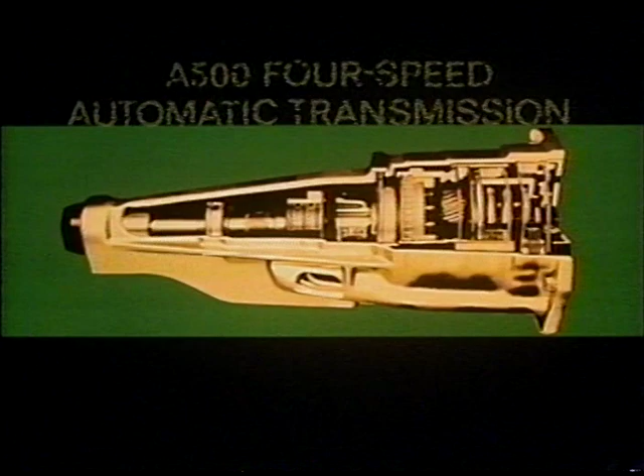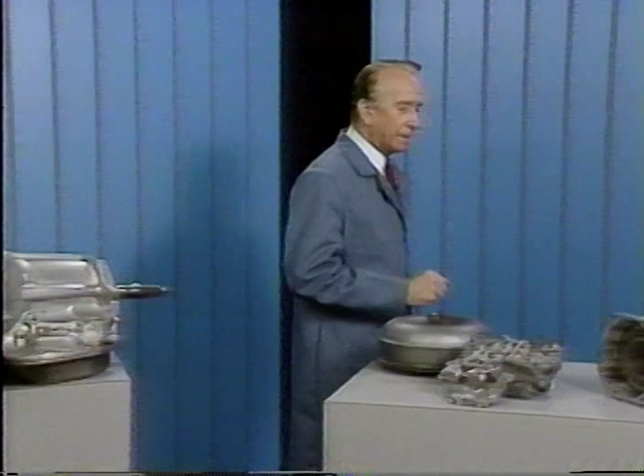Today, we're going to cover the design, operation, and service procedures for the all-new A500 transmission. The A500 was designed to fill a need for buyers interested in increased fuel economy. The A500 begins as a modified A999 three-speed LoadFlite automatic transmission. Then, an overdrive unit in place of the former extension housing provides fourth gear in an overdrive ratio.

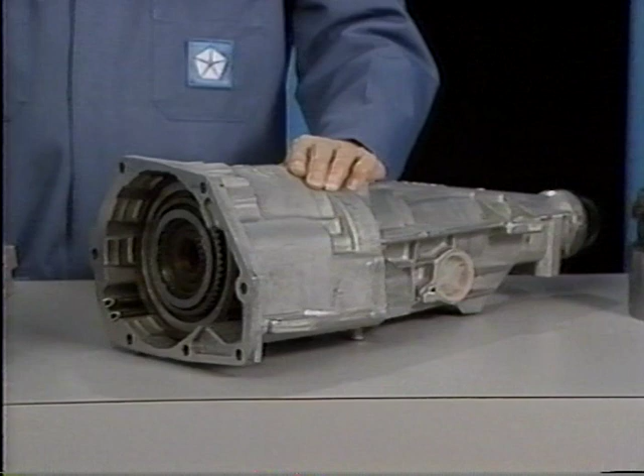This transmission is designed for use with the 3.9-liter V6 in 2- and 4-wheel drive N trucks, namely the Dakota, and B-Ram vans and wagons and D-Ram pickups with the 3.9-liter V6 or 5.2-liter V8. This overdrive unit is designed for truck use and is capable of handling up to 400 foot-pounds of torque. The A500 is 6.5 inches longer than the A999, and it's about 50 pounds heavier.

The other major feature of the A500 is this lock-up torque converter. The lock-up torque converter is electronically controlled and hydraulically activated. Lock-up will occur only in fourth gear overdrive and under conditions determined by the single module engine controller.

A switch on the instrument panel will prevent fourth gear and torque converter lockup operation. This is desirable when towing or when climbing steep grades. This switch will automatically turn off whenever the ignition is turned off. If lockout is desired, push the switch after every startup.

Other modifications of the A500 include the output shaft of the three-speed portion is now referred to as the intermediate shaft, and the overdrive shaft is now the output shaft. The governor and speedometer drive have been moved to the rear of the unit. The overdrive case now contains two bearings. One is the output shaft front bearing, and the other is the output shaft rear bearing.

There are no rotating seal rings or pressurized oil for the overdrive and direct clutches in the overdrive housing. The governor is the only component receiving pressurized oil through these slip-fit tubes. Governor pressure and overdrive pressure taps are provided in the rear of the main case for in-vehicle testing.

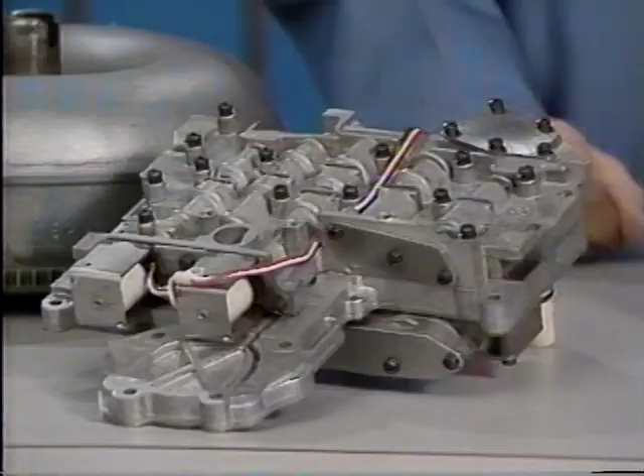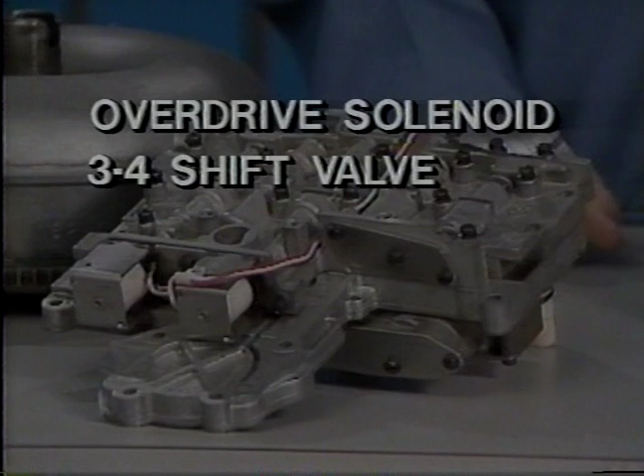The valve body has been modified for use in the A500 by adding several new valves. There's an overdrive solenoid, a 3/4 shift valve, a 3/4 timing valve, a 3/4 accumulator, and a 3/4 shuttle valve. Once in fourth gear, the lock-up solenoid, lock-up valve, and lock-up timing valve accomplish the hydraulics to lock the converter turbine to the torque converter housing.

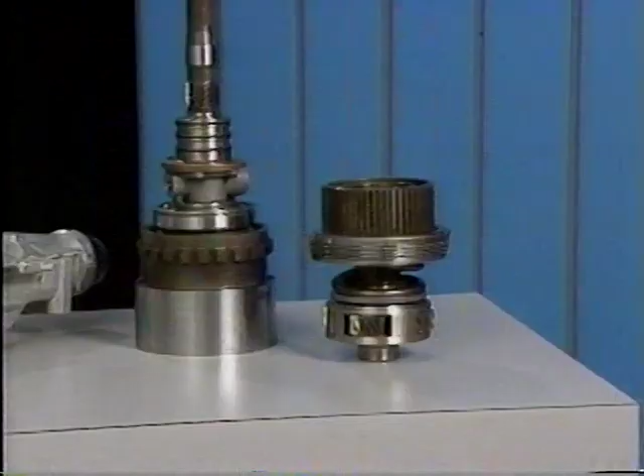The overdrive gear ratio is supplied by a third planetary gear set and its overdrive clutch. In direct drive in third gear, the power flow goes through the direct clutch and the overrunning clutch. This very strong spring, rated at up to 800 pounds, holds the sun gear to the annulus for direct drive. For coasting or reverse gear, power flows only through the direct clutch.

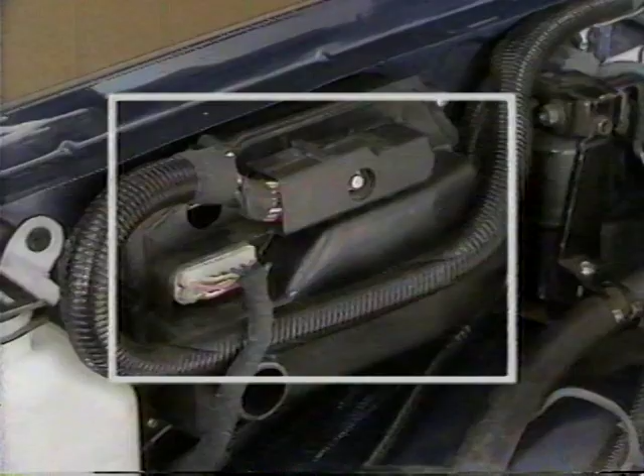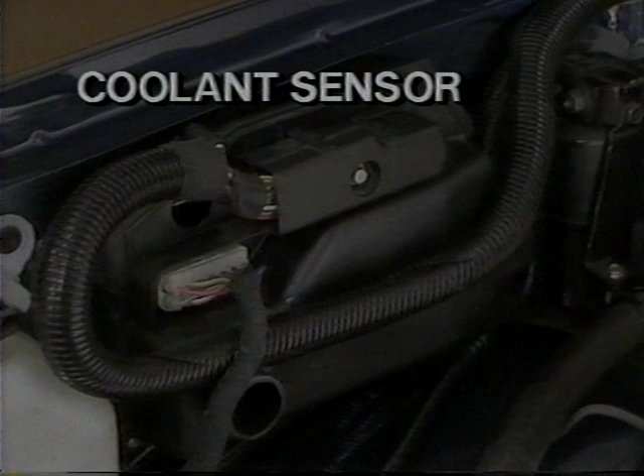The simple shift into overdrive or fourth gear is an adventure in electronics and hydraulics. The shift is determined by the SMEC. When the vehicle is traveling in third gear over 25 miles per hour, the SMEC uses the following information to allow the shift. The SMEC checks the coolant sensor signal, 60 degrees Fahrenheit minimum. It also checks the engine speed sensor, the vehicle speed sensor, the throttle position sensor, and the MAP sensor.

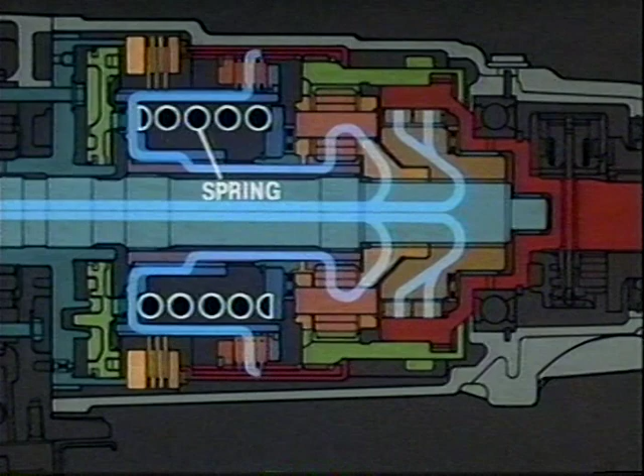In third gear, the power flow comes off the intermediate shaft simultaneously into the planet carrier and the overrunning clutch. The direct clutch holds the sun gear to the annulus under spring pressure for a 1-to-1 ratio. The overrunning clutch carries the power flow during the shift into fourth gear.

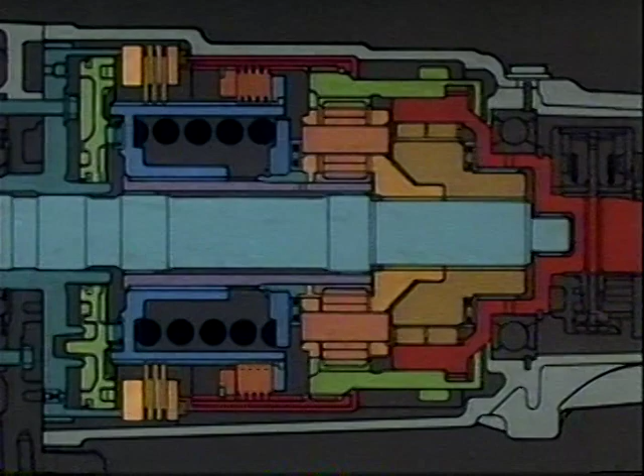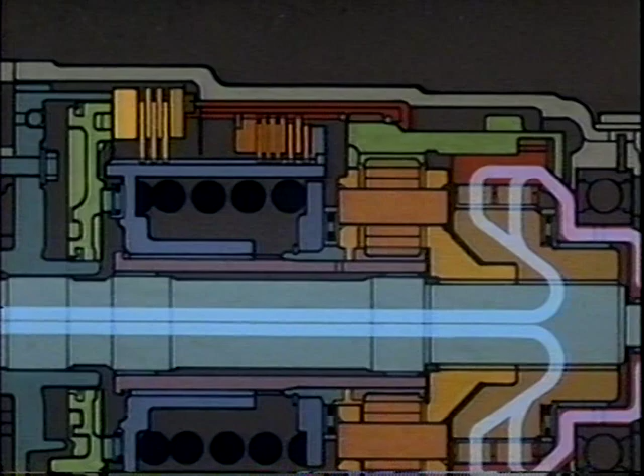When the SMEC energizes the overdrive solenoid, the third gear line pressure starts to move the overdrive piston rearward. The piston pushes the sliding hub and begins to compress the direct clutch spring. Now, with spring pressure relieved, the direct clutch is disengaged. Power flows only through the overrunning clutch.

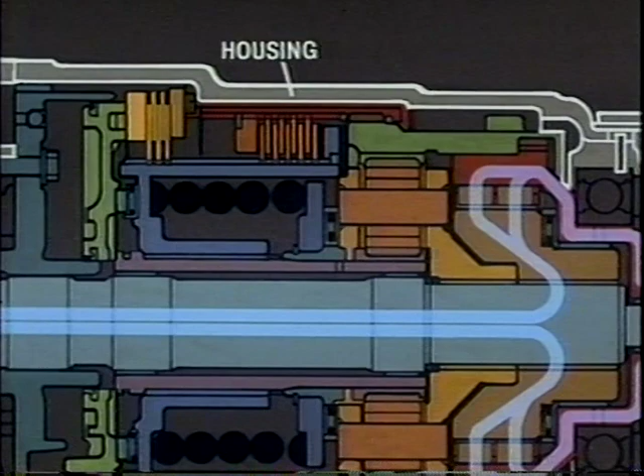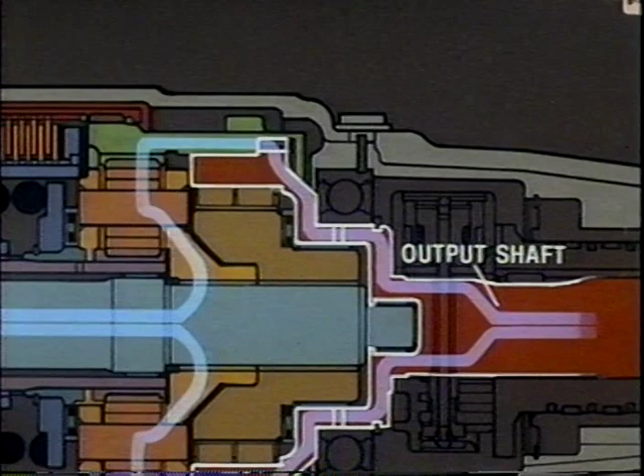As the sliding hub is forced further rearward, the overdrive clutch engages, holding the sun gear to the housing. As power enters the planet carrier, its gears move around the stationary sun gear, so now the engine can turn less for one revolution of the output shaft.

The lock-up torque converter is also controlled by the SMEC. Once in fourth gear, the SMEC signals the lock-up solenoid to close, supplying pressure to the lock-up valve. The lock-up valve directs pressure to the torque converter where the turbine is clamped to the spinning torque converter housing. This eliminates any slipping normally attributed to automatic transmissions. The lock-up valve releases the torque converter to normal operation prior to the 4-3 downshift.

Well, now that we've seen what the A500 overdrive unit is and how it works, let's go through a step-by-step disassembly and assembly procedure for the A500 overdrive unit, since that is the new hardware. Before raising the vehicle, place the gear selector in low gear. This will retract the parking rod for easier disassembly.

If there is major hardware failure within the overdrive unit, or if the fluid is contaminated enough to cause problems with the main portion of the transmission, then remove the entire transmission. If the diagnosis indicates clutch or governor problems only, then remove only the overdrive unit.

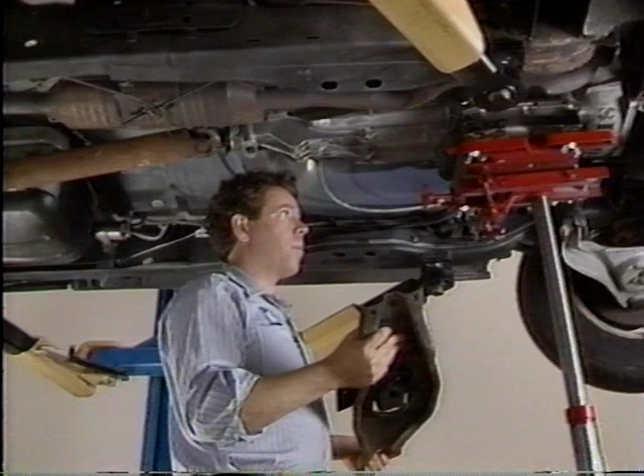To start the overdrive removal, drop the oil pan, drain the oil, and then reassemble the pan. Support the transmission and raise it enough to remove the cross member. Next, remove the speedometer cable.

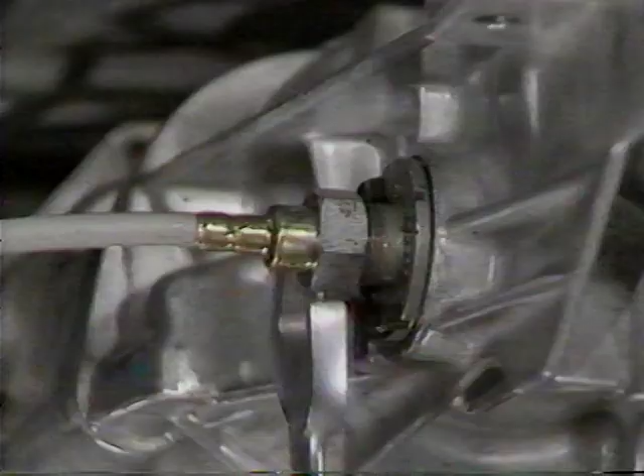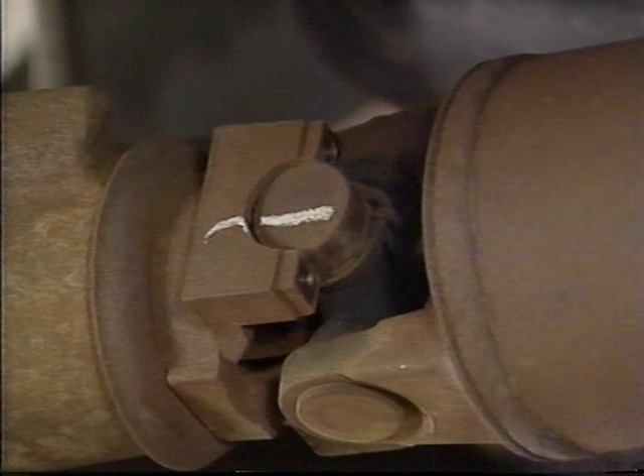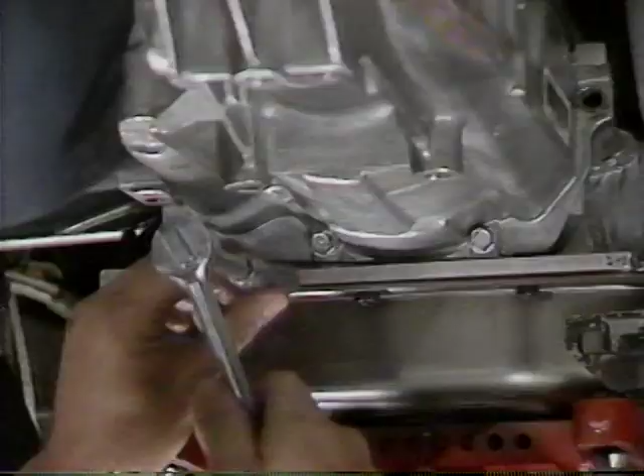Remove the yoke straps, mark the position of the drive shaft, and remove it. There are 7 bolts securing the 2 transmission portions together. Loosen the 2 cases after removing the last bolt. Very carefully pull the unit off of the intermediate shaft.

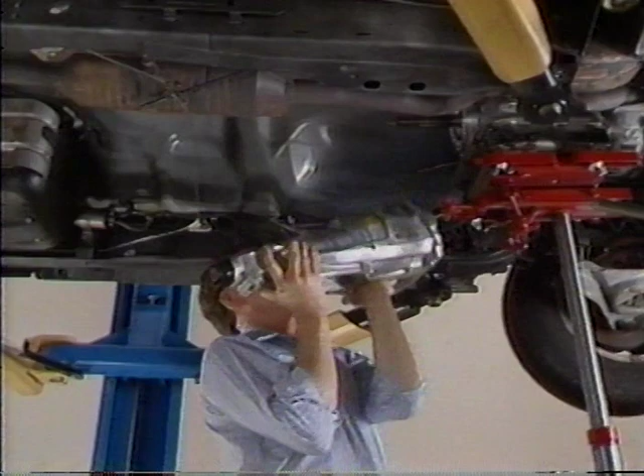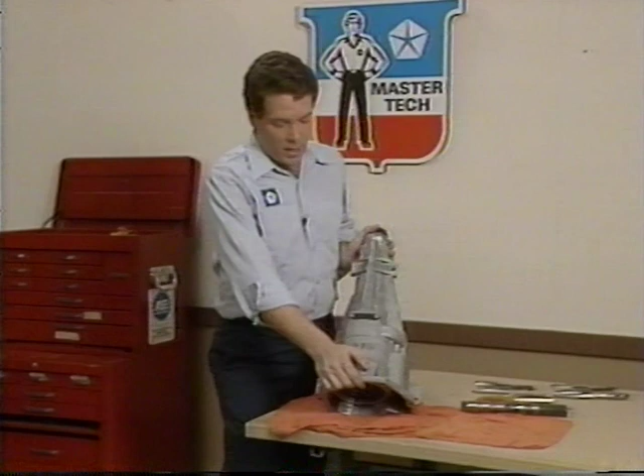A bearing and a select spacer may be either on the piston, the sliding hub, or the intermediate shaft. You'll need these to check clearances after reassembly. Once at the bench, tip the unit so that any excess oil drains into a few shop rags. Watch for any sign of abnormal wear, such as clutch material or metal fragments in the oil.

Now, this is a very sturdy unit, and you should not expect to be totally disassembling every piece. But in the event of a failure within the overdrive unit, you must inspect each part. Remove the overdrive clutch snap ring. Then pull out the alternating metal and friction clutch components. Take a close look at each clutch component for signs of wear.

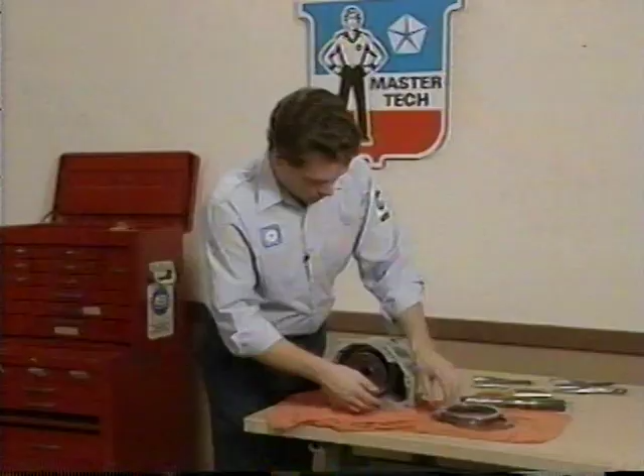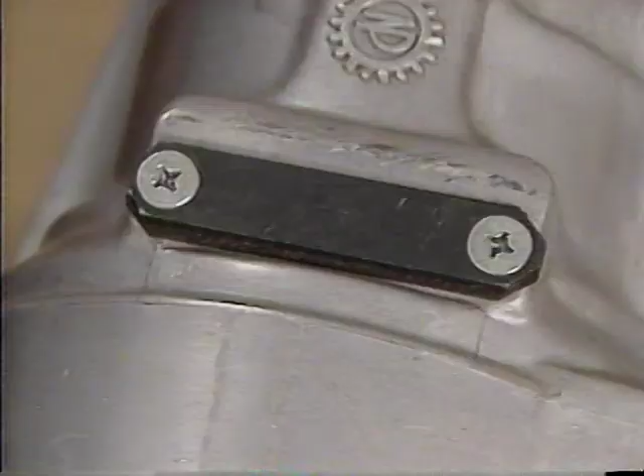Next, take out the wave ring. This special ring acts as a cushion to absorb the shock when the overdrive clutch engages. And then there's another large snap ring to be removed. Unscrew the 2 Phillips screws and remove the access plate. This snap ring holds the output shaft front bearing in place.

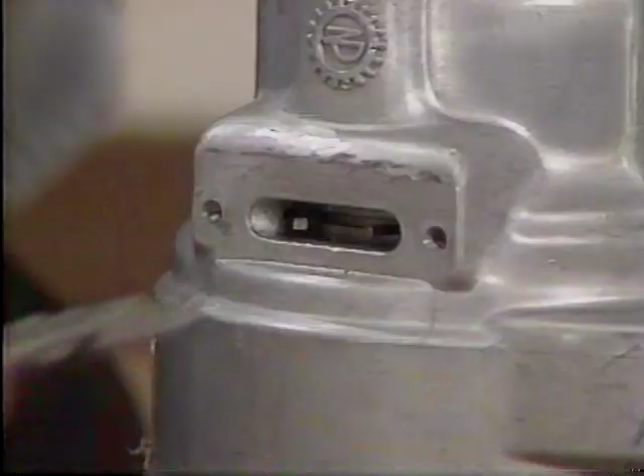Now, since the entire case must be inverted to remove this ring, insert the alignment tool, Miller Special Tool C6227, and invert the case on the shaft. Expand the snap ring and lift the case off the gear train.

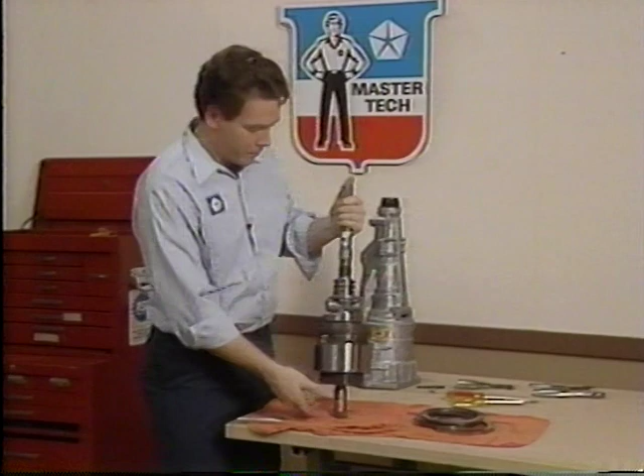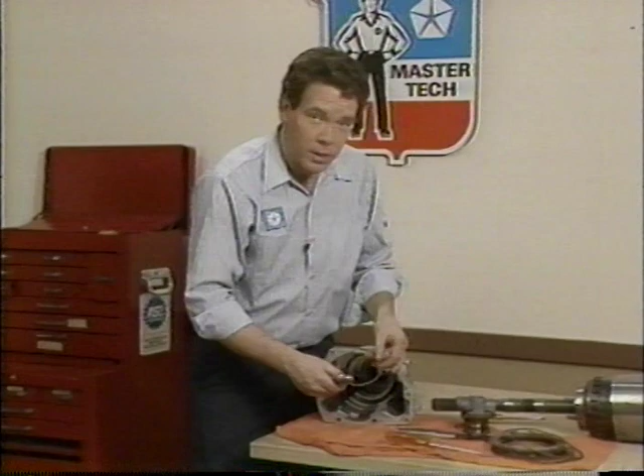Follow service manual procedures and remove the governor and shaft key. Remove the snap ring, then remove the governor housing snap ring. Now you can remove the governor housing with the slip-fit tubes out of the case. Using snap ring pliers, remove the output shaft rear bearing snap ring. Now, by tapping the case on the bench, the bearing should drop out.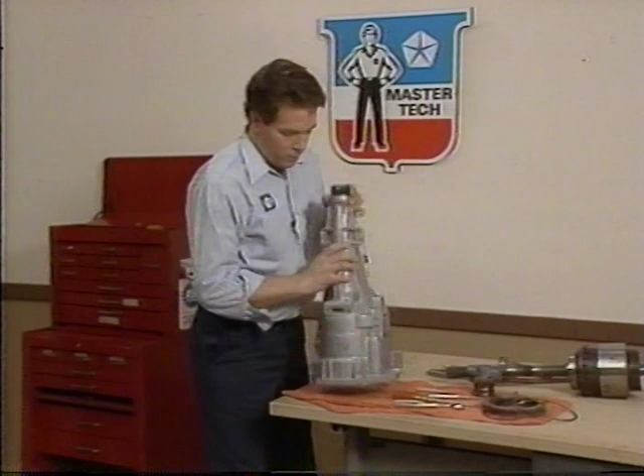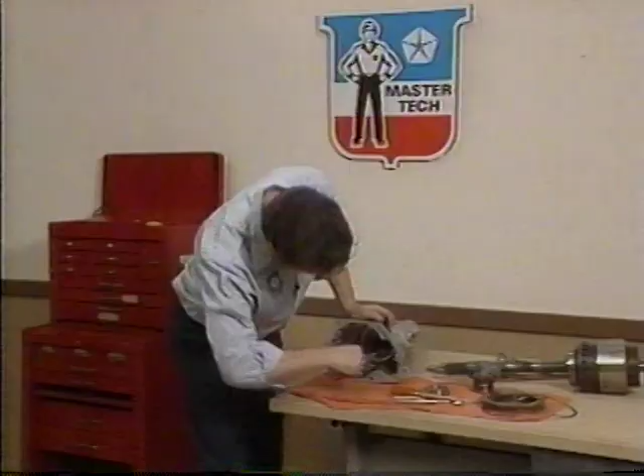All right, next, let's remove the parking mechanism. First, remove the reaction plug snap ring. Next, unscrew the bolt securing the dowel and parking pawl. Now, another tap of the case on the bench will cause the dowel, parking pawl, and reaction plug to drop out.

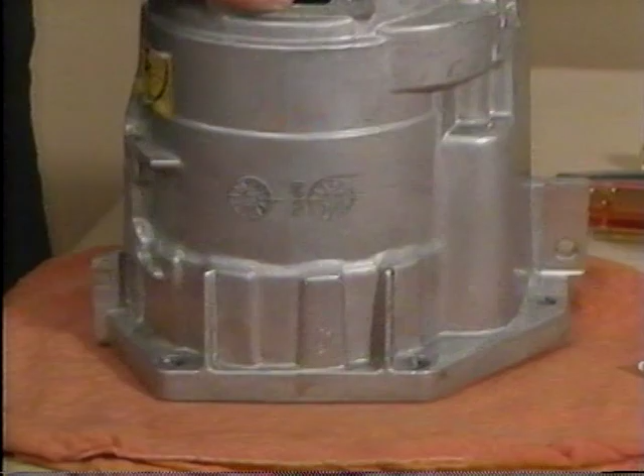At the very rear of the case, a standard A727 rear transmission bushing and seal are used at the output shaft. Now let's take the gear train to the arbor press. It's very important that you use an arbor press, not a hydraulic press, to compress the direct clutch spring. A hydraulic press doesn't have the travel required to perform this critical step safely.

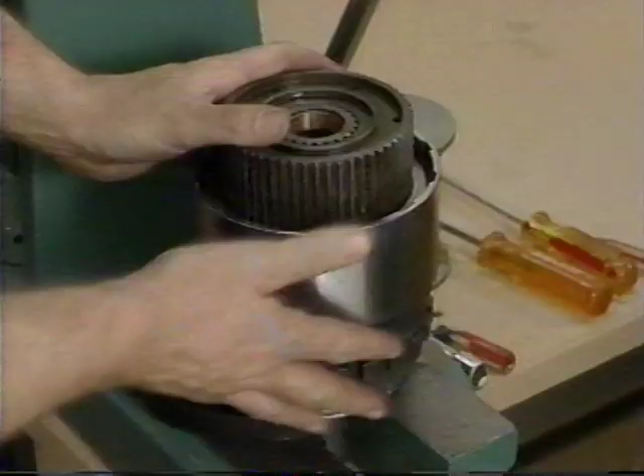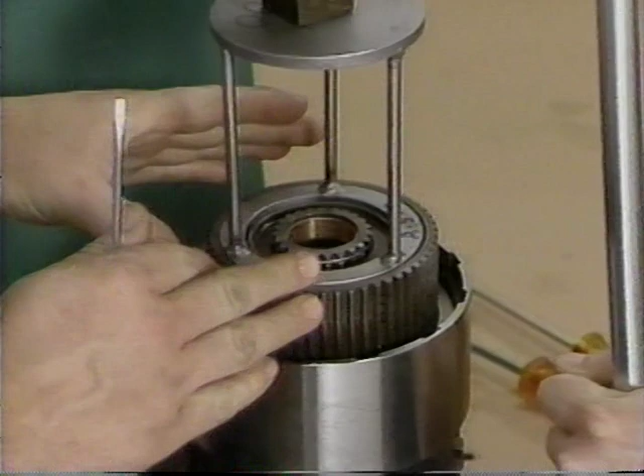Place the output shaft in a fixture which will support the output shaft flange. With the assembly properly supported, place the special tool C6227 in place. Have a helper compress the direct clutch spring. When the hub is compressed, you will now be able to safely remove the larger load retaining ring, and the smaller load retaining safety ring.

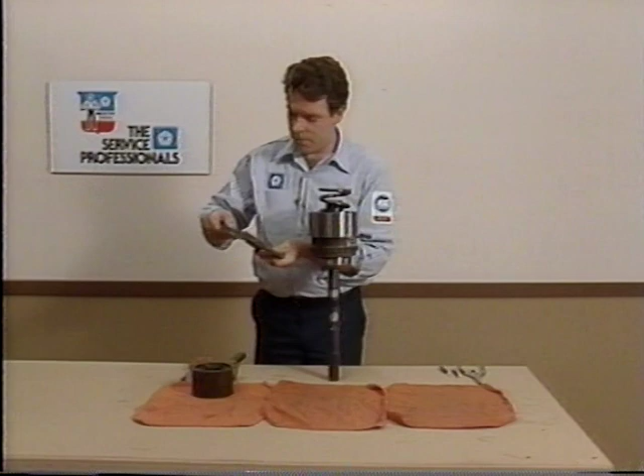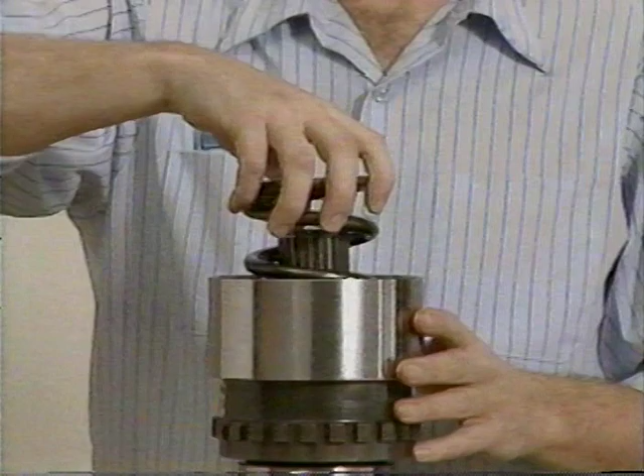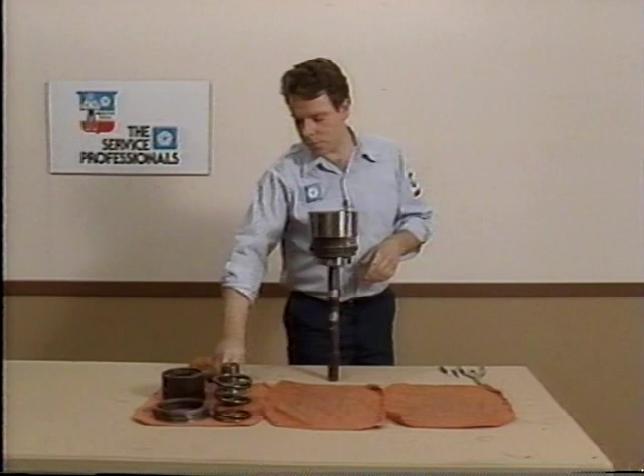Now that the direct clutch spring tension is relieved, the rest of the unit can be disassembled. Now lift off the sliding hub with the direct clutch on it. Remove the components of the clutch and inspect them one at a time. Next, remove the direct clutch spring, the sun gear, a needle bearing pack, and the planet carrier.

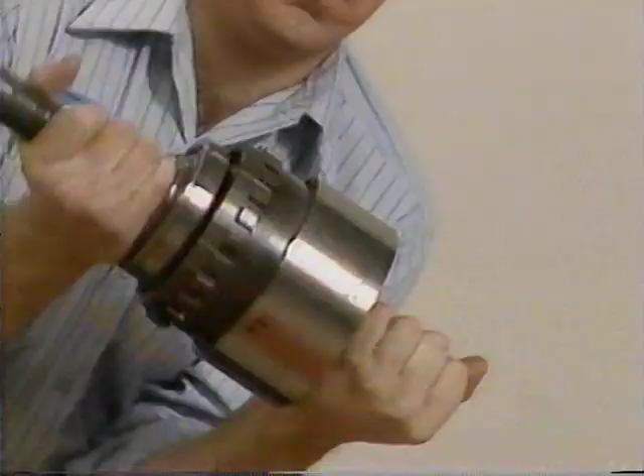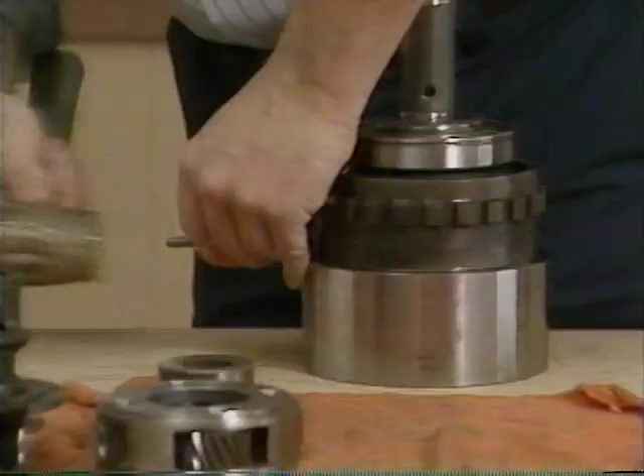Invert the assembly, and using expanding snap ring pliers, you can remove the overrunning clutch intact with a quick counterclockwise twist. Also, remove this needle bearing. Now index the direct clutch drum to the annulus for exact assembly. Two wire retaining rings secure this direct clutch drum to the annulus, a front one and one partly under the rear of it.

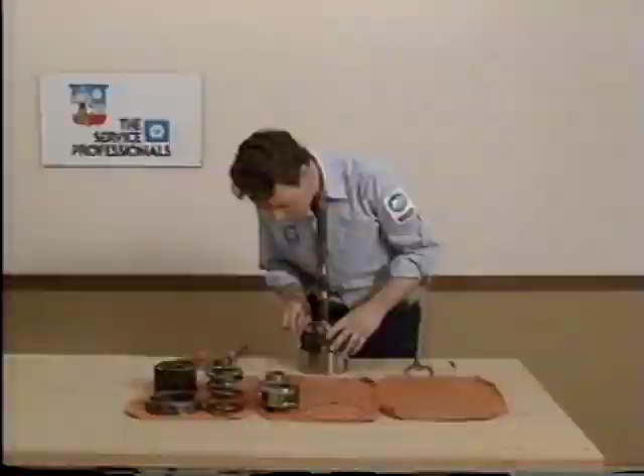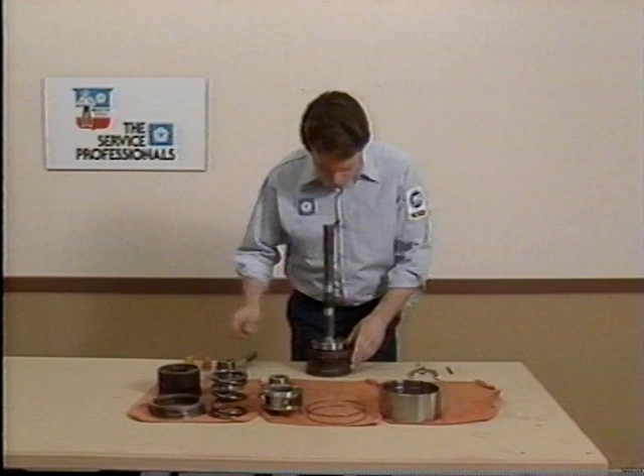Now the drum slides from the annulus. Index the annulus to the output shaft for exact reassembly. To remove the annulus, one snap ring secures it to the output shaft. Now a light tap with a soft mallet pops it off the shaft. Now the only component left is this output shaft front bearing. Removing it, however, ruins it, and a new one must be pressed onto the shaft.

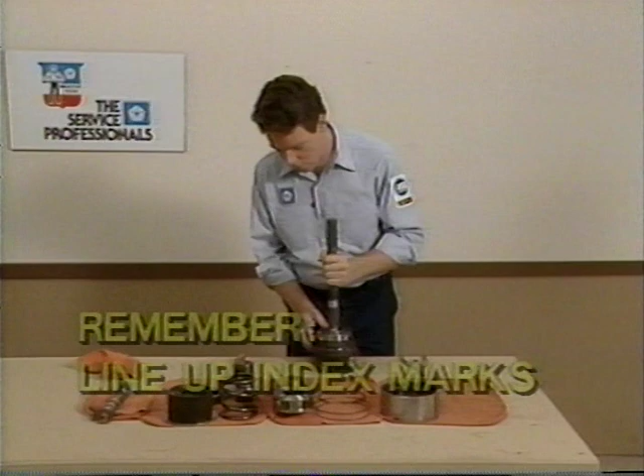Now before assembling, clean all parts and dry with compressed air only. Cleaning parts with shop rags tends to plug the filter with lint. Now, to assemble the overdrive unit, insert the shaft through the back of the annulus, and secure it with the snap ring.

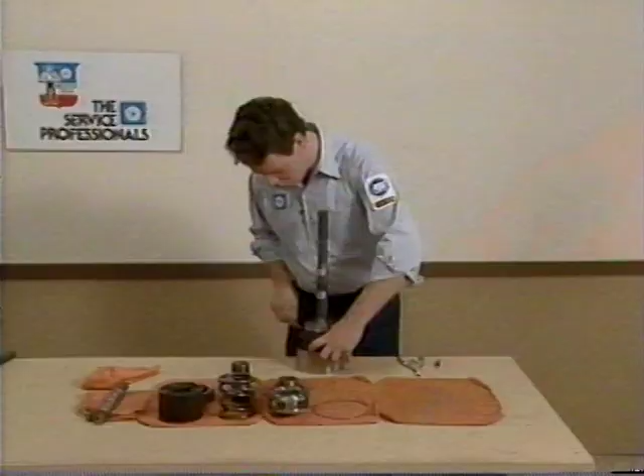Next, set the direct clutch drum face down and insert the annulus lugs into the slots inside the drum. Insert the rear retaining ring first. Then install the front wire retaining ring to secure the drum.

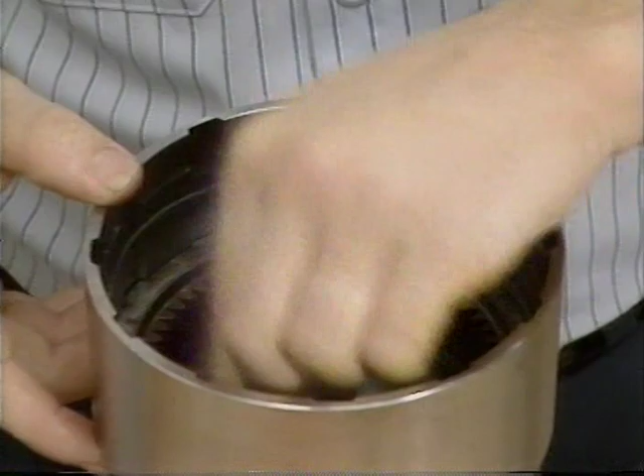Now hold the overrunning clutch upside down with the expanding snap ring pliers. Place the needle bearing against the back face of the clutch. Now, hold the shaft assembly upside down and with a counterclockwise twisting motion, install the overrunning clutch.

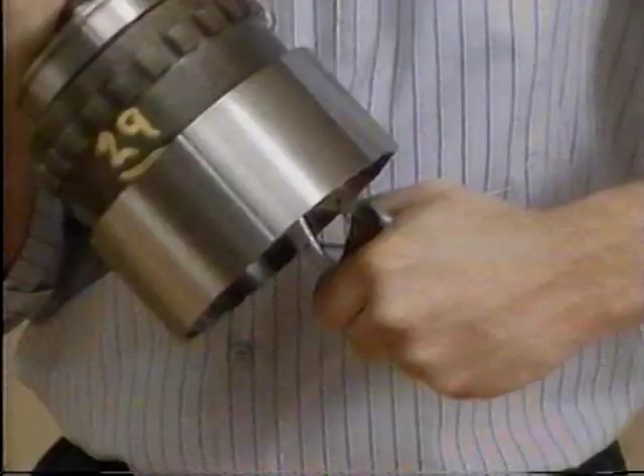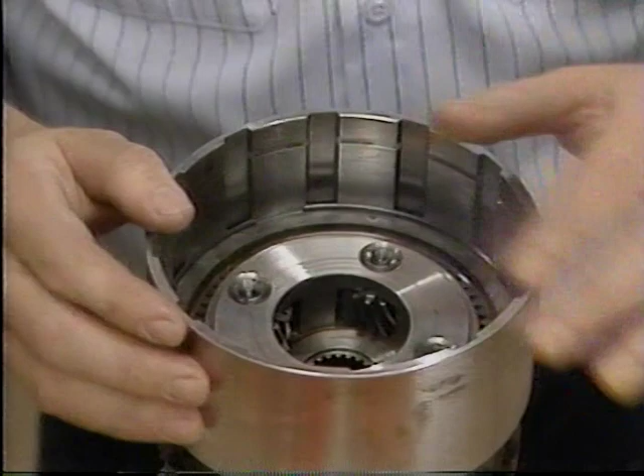Next, carefully set the carrier assembly into the annulus and align the splines using the special tool. Next, set the needle bearing in place. Remove the tool and install the sun gear.

Place the special tool back into the splines. Set the spring on the sun gear. Then place the sliding hub on the spring. Install the direct clutch plates one at a time on the hub.

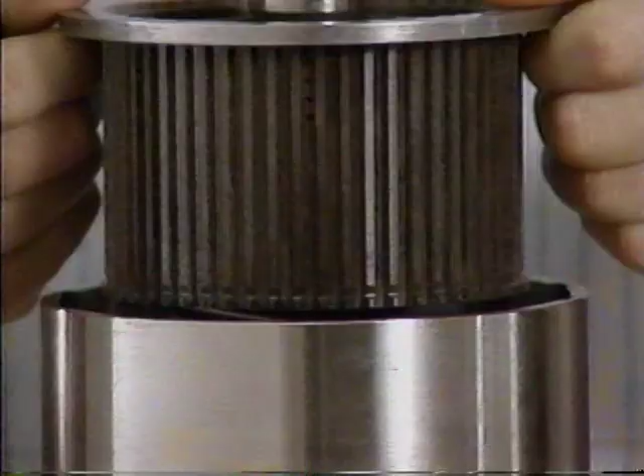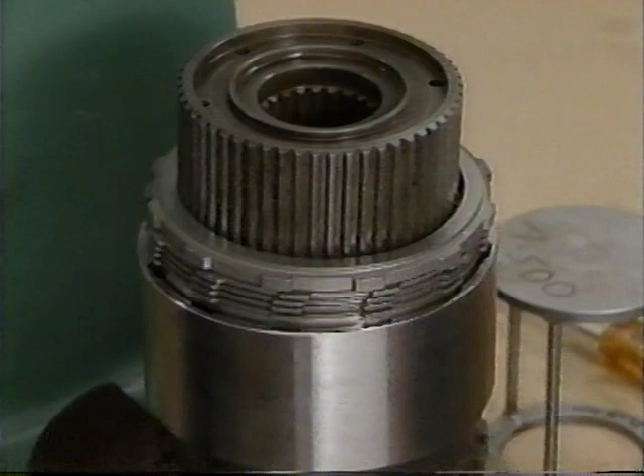The next step involves compressing the direct clutch spring with the arbor press. Set the special tool on the hub and compress the spring. Remember, you'll need a helper to operate the press. As the spring is compressed, slide the clutch plates into their grooves and down the hub. Install the large load-retaining snap ring.

Now install the safety ring. Slowly release the press, ensuring that the load retaining rings are properly seated. Set the gear train aside and then reassemble the parking mechanism. The pawl engages with these large protrusions on the annulus when park is selected.

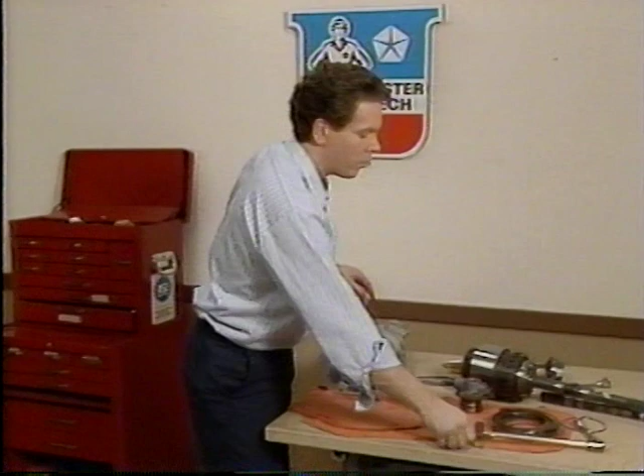Install the dowel, parking pawl, and spring back into the case. Then reinstall the retaining bolt and torque it to specs. Next, place the reaction plug in and secure it with its snap ring.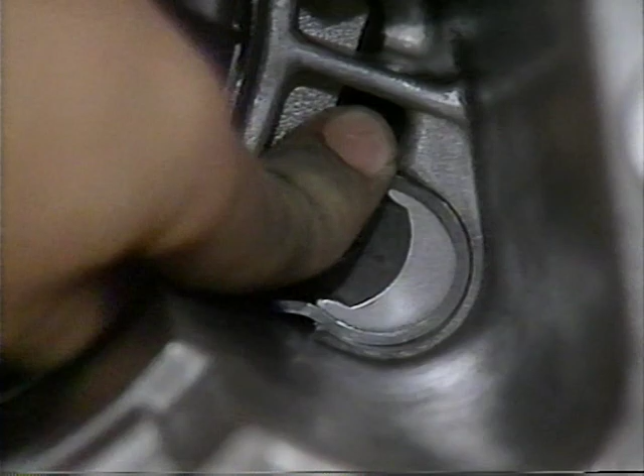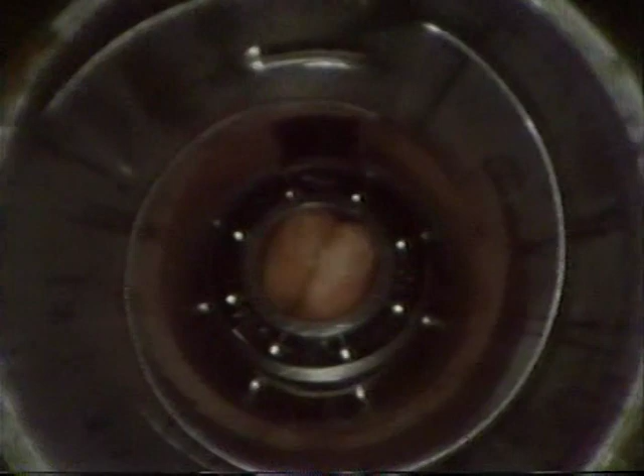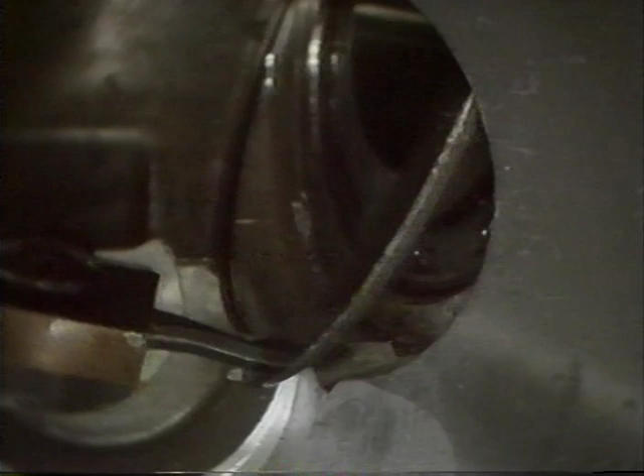Set the output shaft rear bearing in the case, ensuring that the groove is toward the front of the unit. Then install its snap ring. After installing the governor, install the governor housing and secure it with its snap ring.

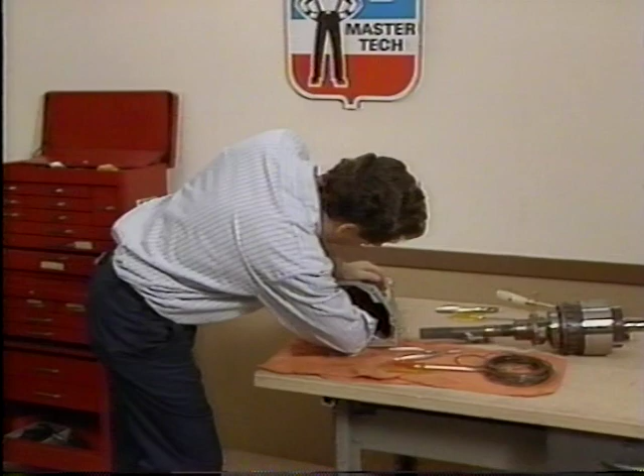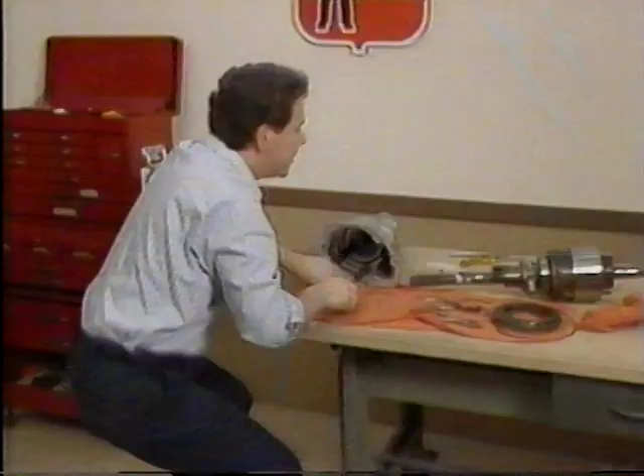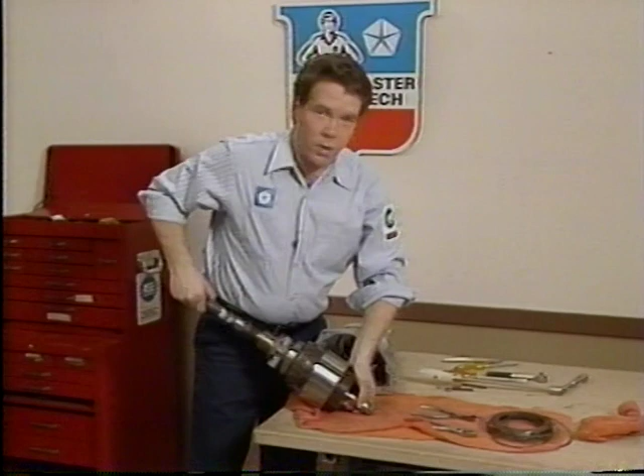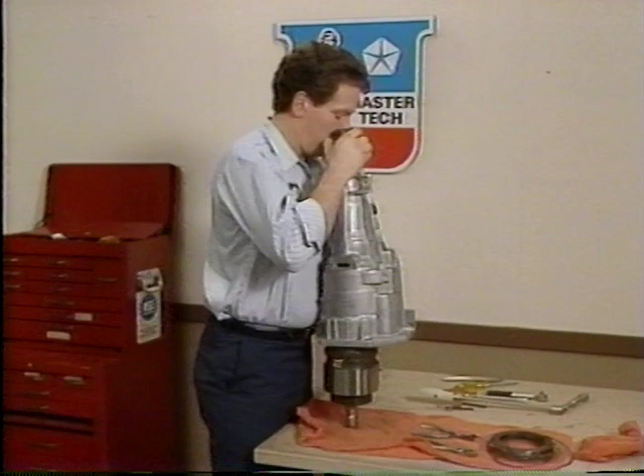Now install the output shaft front bearing snap ring in the case. Make sure the alignment tool is reinstalled in the gear train. Invert the gear train and slip the case over the shaft. Expand the snap ring and slip the case down until the ring locks in the bearing groove. Then release the snap ring.

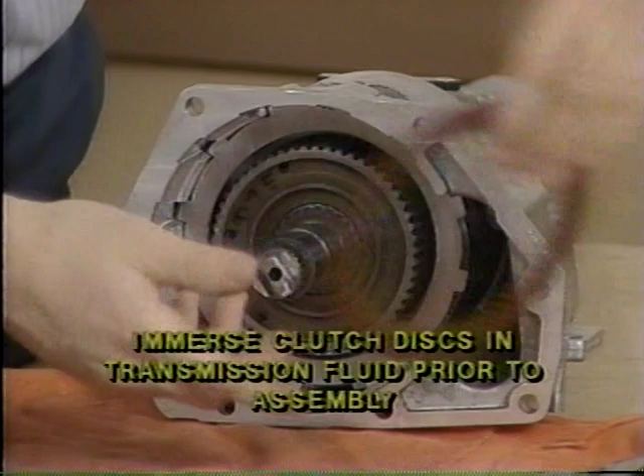After reinstalling the access plate, reinstall the flat ring. Use a large screwdriver to be sure that it's seated properly. Then reinstall the wave ring using the same seating technique. One by one, install the overdrive clutch plates. When the final plate is in place, install the final wire retaining ring to secure it.

This overdrive unit is almost ready for installation. However, one measurement should be taken to ensure proper clearance within the gear train. Measure from the sliding hub bearing seat to the facing of the overdrive case. This determines the thickness of this select spacer. If it's within tolerances, you're okay. If not, then select a thinner or thicker spacer to achieve the tolerance required.

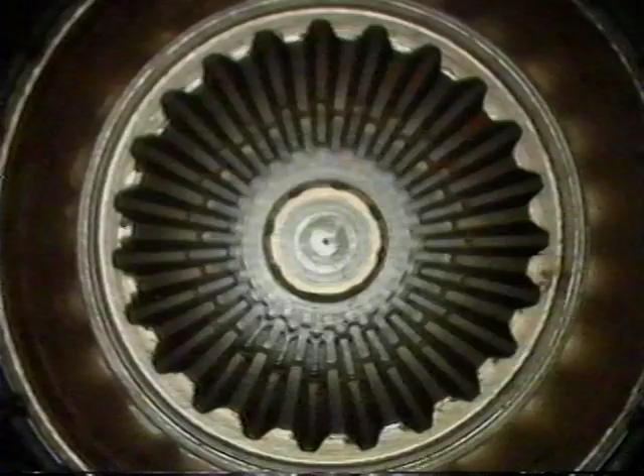The other important point here concerns hardware failure in the overdrive unit, such as when replacement of the annulus, the carrier, the overrunning clutch hub, or the intermediate shaft is required. The measurement of new component stack-up for correct intermediate shaft location is critical. To check new component stack-up, measure from the carrier spline shoulder to the facing of the overdrive case.

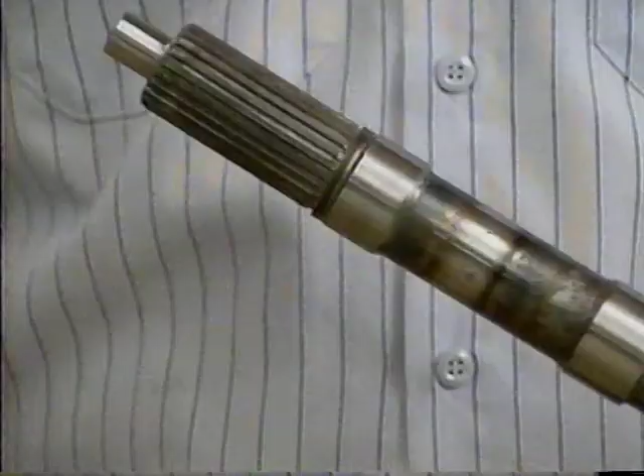If the measurement is within specifications, everything's okay. If not, however, the measurement will indicate which size spacer should be placed on the end of the intermediate shaft for correct location. Spacers are available in 4 thicknesses. This little spacer is very important to the longevity of the transmission.

Then assemble the main portion of the transmission and check the input shaft end play. Adjust the number 3 selective thrust washer according to the service manual procedures for the A999 3-speed TorqueFlite transmission. Install the overdrive unit to the main case on the bench.

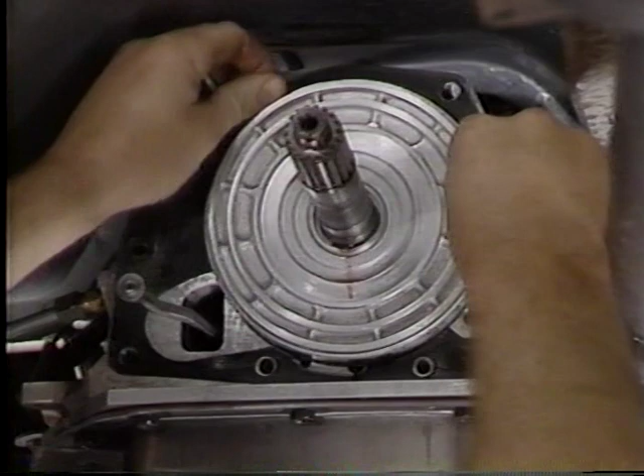If the overdrive unit required only a clutch replacement or other service not including major component replacement, then the intermediate shaft location set at the factory will be okay. You will, however, need a new gasket. Use a sharp knife and cut the old gasket around the piston. Place the old gasket on the new one as a template and trim the new gasket to fit.

Okay. Now you must try not to twist the case while installing the unit. The carrier and overrunning clutch splines will rotate out of alignment. If this happens, you'll need to realign them with a special tool, or you may be required to disassemble the unit and align them again. Align the slip-fit tubes and push the case forward.

Install the 7 attaching bolts, snugging them up to the flange of the overdrive case. Tighten the 7 bolts, torquing them to specifications. After installing the drive shaft and the cross member, follow fluid refilling procedures and add the required amount of transmission fluid.

The new A500 4-speed automatic transmission is quite a feat of engineering. And equally so, it's a new and exciting challenge to prove you have what it takes to service this new transmission. Even if you've never serviced one before, the videotape you've just seen will help you tackle the job and do it right the first time.